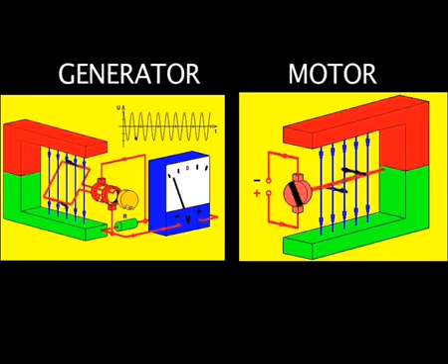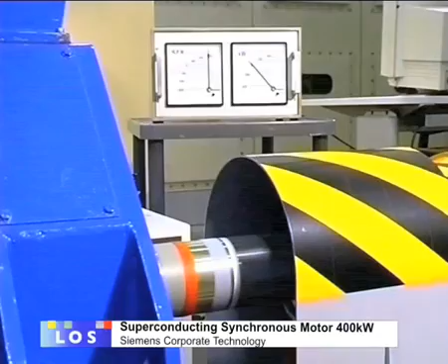In practice, however, life is a little bit more complicated than that. You don't just build a machine and then decide afterwards what to use it for. You design it specifically to operate as a motor or as a generator, but there are secondary reasons for that, constructional reasons and special requirements.

Low temperature superconductivity has been enormously successful in many applications, but rather interestingly, not so much in power applications, for various reasons, mainly to do with reliability and high cost. High temperature superconductivity, on the other hand, seems to have removed many of the restrictions I just mentioned and carries a lot of promise for this type of application.

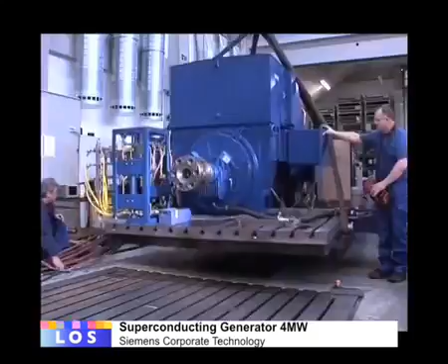There are many types of electrical machines. In fact, the most popular type, probably over 70% of the market, is dominated by what is known as induction motors. But there are applications, especially for very large machines, where different types are used, called synchronous machines.

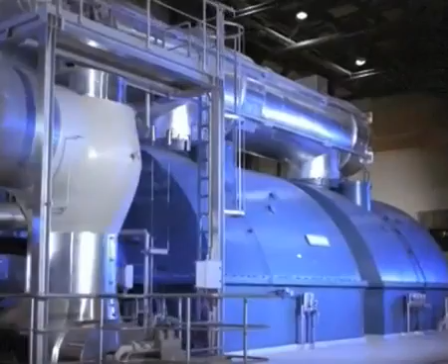These are the machines used in power stations as generators and in industry as large industrial motor drives. It is therefore these types of machines which, in terms of large power applications, would be of most interest to anyone. I think the idea to put together everything in a ship, to have an all-electric ship, using superconducting devices, is really a very fruitful idea.

Power level is, I think, a little bit higher than has been achieved so far, so much work should be done in that respect. But that is a stepwise process.

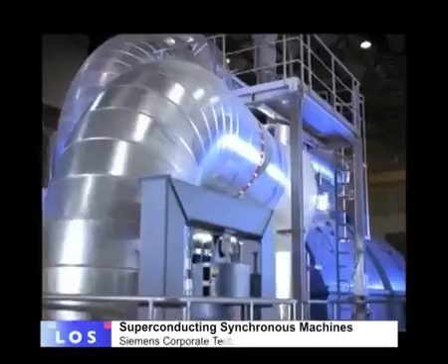HTS technology in large power station generators is particularly aimed at improving efficiency. Thanks to the size of units, ranging from 100 to 900 megawatts, a substantial amount of primary energy can be saved, and thus costs. At the same time, these improvements at the source of power generation considerably reduce emissions to the environment.

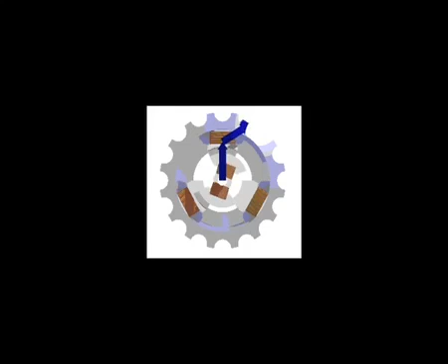Well, the torque on an electric motor is normally calculated by the product of the field and the current in the rotating rotor. And of course, this is perfectly legitimate.

But it's interesting to look at the maximum that we might be able to get from a superconducting material. What are the material limitations? The answer is that every superconducting motor is dragged round because of the forces between the flux lines and the pinning centers. Therefore the maximum force you can get is BJC per unit volume.

That's not very easy to reach 2 Tesla in a motor because we don't have the advantage of iron. We need to try to produce this sort of field. However, the benefits of operating at this level are orders of magnitude, and so we don't need to get anywhere near this in order to get big improvements in motor performance.

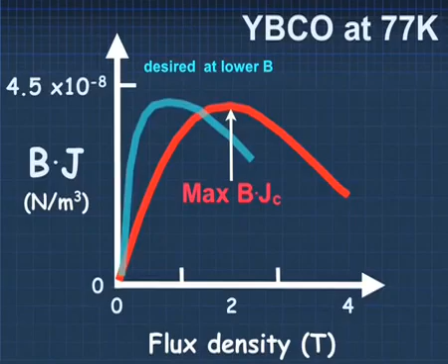We could improve motors greatly if we could shift the maximum down to, say, 1 Tesla, but keep the maximum value the same, and this is a job for the material scientists. It means that ideally, if you can get the peak lower down, then it's much easier to make a motor out of it.

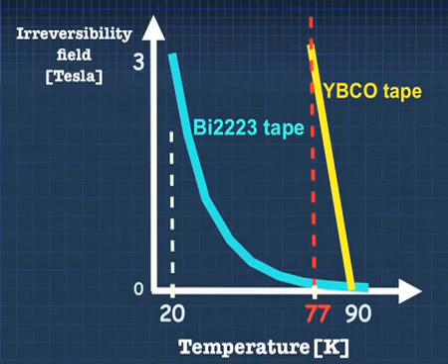The electric loading essentially is limited by the current density in the wires, and the magnetic loading is given by saturation flux density of magnetic components.

In the case of high temperature superconductivity, there is a possibility of increasing at least one or possibly even both of them. Certainly the electric loading can be increased significantly because of the current densities which may be achieved in such superconductors. From the point of view of practical applications, this is the critical current density.

One employs superconductors in devices and machines because of this possibility of current densities some 10 to 100 times higher than would be possible

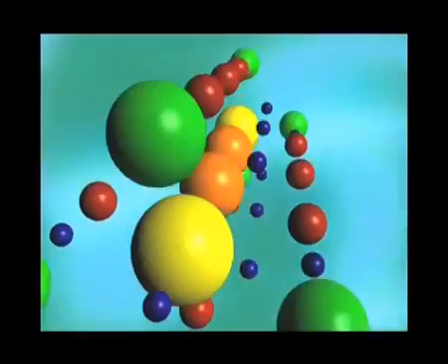with conventional non-superconducting materials. Tapes are made out of the brittle ceramic material in an elaborate high-tech process. In the superconducting state, these tapes are capable of carrying 30 times more current density than copper. This superconductor can be operated with a current of 100 amperes. For comparison, a copper conductor would need this cross-section.

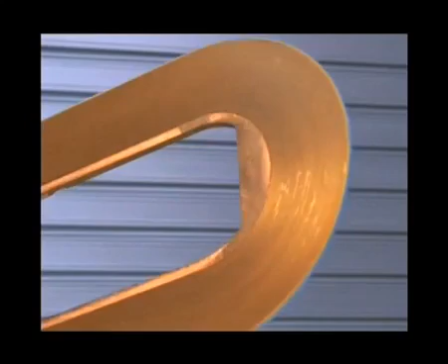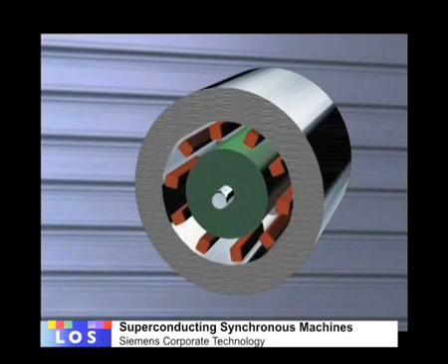For use in electric machines, the tapes are processed into flat racetrack coils, which are assembled into rotor windings of the superconducting synchronous machine. This setup enables considerably stronger magnetic fields in the machine's interior. Simultaneously, it's possible to manufacture the stator with less iron, thus accommodating more power-boosting windings.

In terms of removing the restriction on magnetic loading, it's mainly to do with the fact that we may actually not need certain magnetic parts in the device. Therefore, inevitably, these parts will not get saturated because they don't have any magnetic properties.

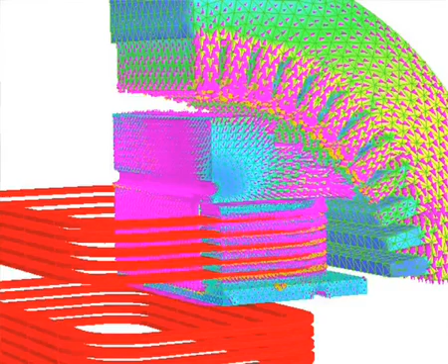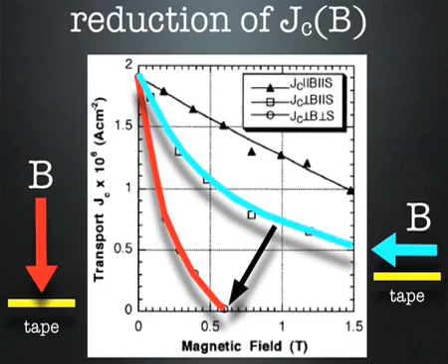HTS tapes have anisotropic properties. If the field is in the perpendicular direction to the broad face of the tape, then the critical current is much lower. This is a challenge, a problem, because the field in the machine will go where it wants to go. So the challenge for the designers is to force it to go in the direction which we want.

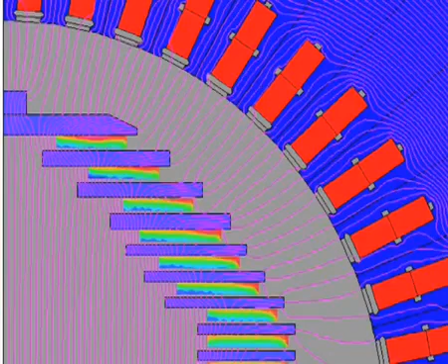That gives rise to a rather clever idea of using so-called flux diverters. This has been used in transformers and generators as well. The flux diverters simply force the field to go in a particular direction, our preferred direction, which is parallel to the broad face of the tape.

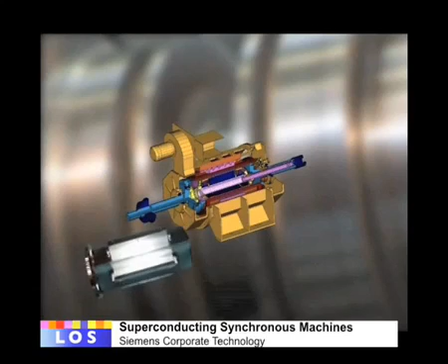The principal components of a synchronous machine with a superconducting rotor winding are the air gap stator winding, the rotating cryostat, a rotating thermos flask that envelops and thermally insulates the superconducting part of the rotor, the pole core, made of a special steel usable at low temperatures, which carries the rotor winding, the superconducting rotor winding, made up of individual racetrack coils, and the torque transmission element that isolates the cold core from the shaft.

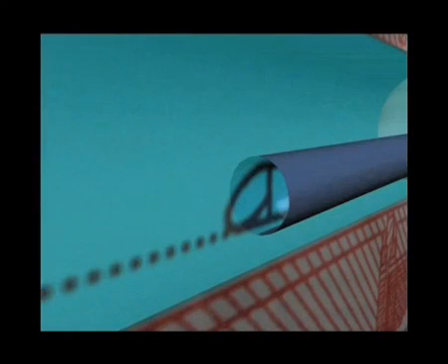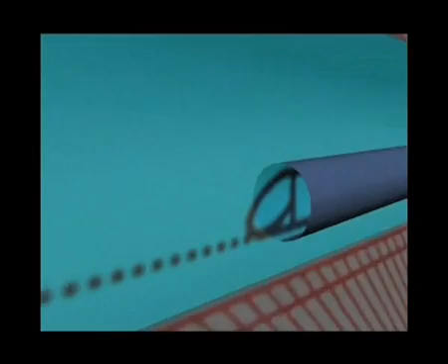A self-regulating cooling system is developed to cool the rotor to the operating temperature of about -250 degrees Celsius. A commercially available refrigerator cools the condenser. There, the working gas neon condenses and, driven by gravity, runs through the cooling pipe into the rotor's interior. Here, it evaporates while cooling the rotor. The vapor returns to the condenser, where it is liquefied again. The cooling system is therefore a closed circuit, so it operates completely passively and requires little maintenance.

It is in fact much easier to build a device to operate at lower temperatures like 20 to 30 Kelvin, because the properties of the tapes are so much better. So the challenge is really to try to stick to the temperature of 78 Kelvin. This makes the design more difficult, but ultimately, if it's built and works well, it will be much better than at lower temperatures.

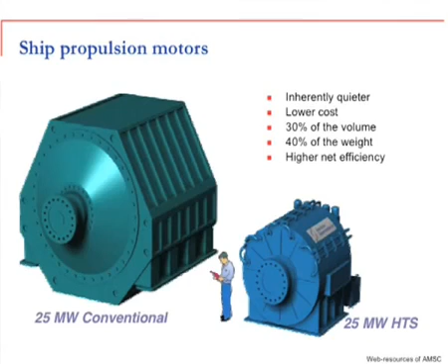The other possible advantage is reducing the losses. Now the losses in some devices are significant. If you take, for example, a large generator in a power station, a typical generator of about 300 MVA may have over 5 megawatts of losses. Now that still makes the device very efficient, but 5 megawatts is an awful lot of losses.

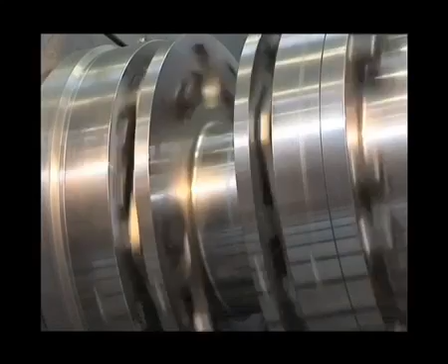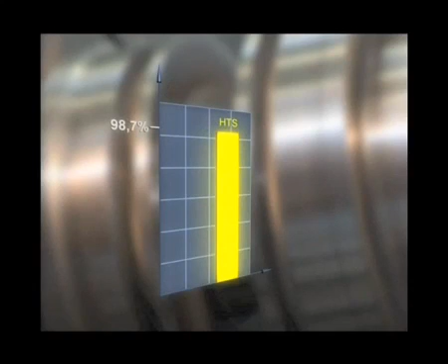Superconducting machines have clearly lower losses, which is reflected in a significantly higher efficiency. For example, the HTS machine, belonging to the 4 megawatt class, has an efficiency of 98.7%, in comparison with only 97% in the case of a corresponding conventional machine. This means that losses are halved.

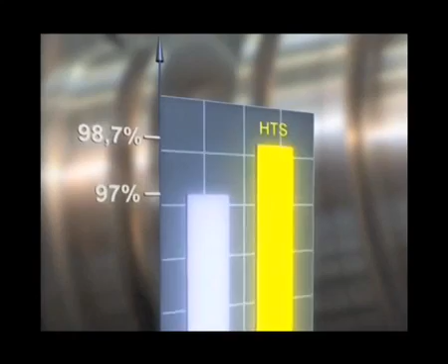Every percent of efficiency increase of one single 4 megawatt machine saves the atmosphere about half a ton of CO2 pollution every day. Despite the same power output, superconducting machines are significantly smaller. The volume and weight savings open up wholly new scope for future applications.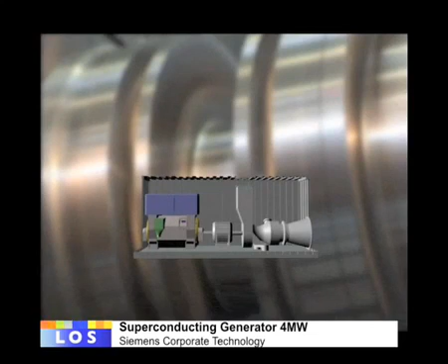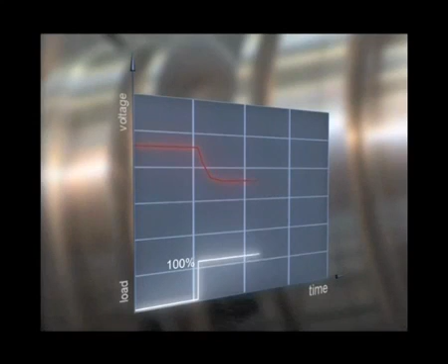Their innovative technology makes these machines clearly less susceptible to load fluctuations. Whereas voltage drops of up to 20% are encountered in 100% load switching by a conventional machine, the superconducting machine suffers a voltage drop of only 3%. The overload reserve is up to 7 times the rated power.

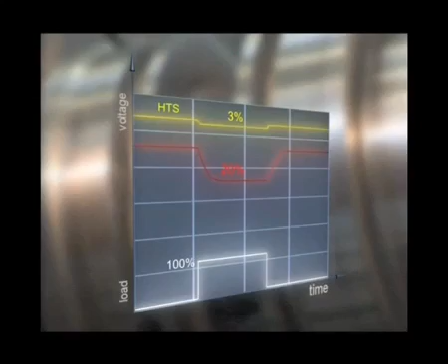Therefore, superconducting machines will be advantageous wherever there is a need for small, compact machines or particularly stable performance. What's more, thanks to the improved efficiency, not only the user profits, but also the environment. And another quite fascinating application might be to use it for induction heating.

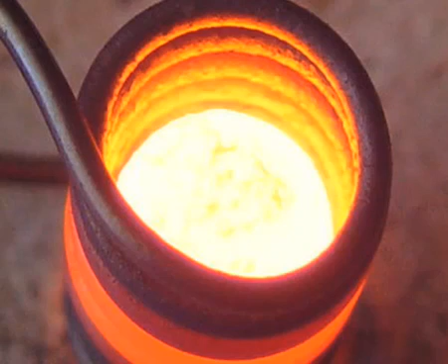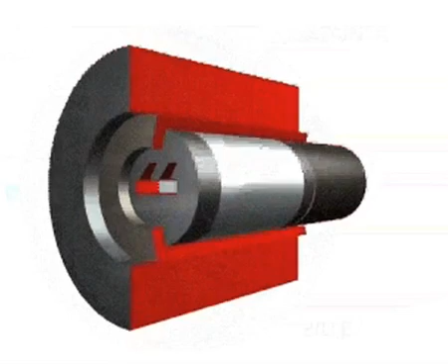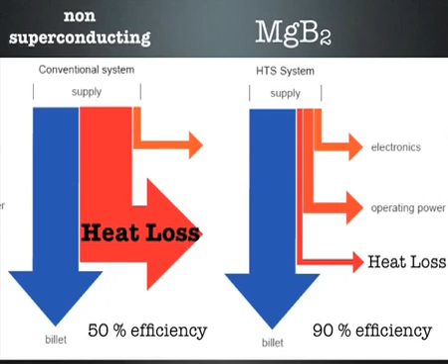A novel and interesting approach to reduce the losses in a coil is to use superconductors in the coil windings. Now we have a DC coil made of magnesium diboride, and we can rotate the billet. That way we can heat the billet, and of course we must have a motor and a unit which pushes the billet into the system. The benefit of this kind of system is that conventionally induction heating has an efficiency of about 50%, and with this concept it can be raised to over 90%.

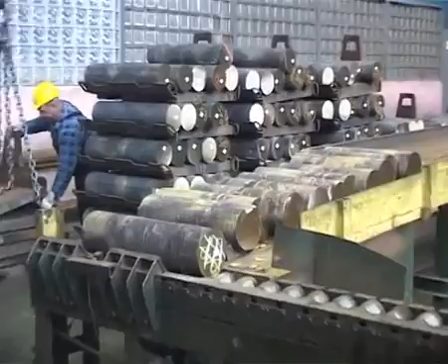And as we know, in Europe, for example, there are very, very many industrial plants using induction heating, for example, for aluminium and copper.